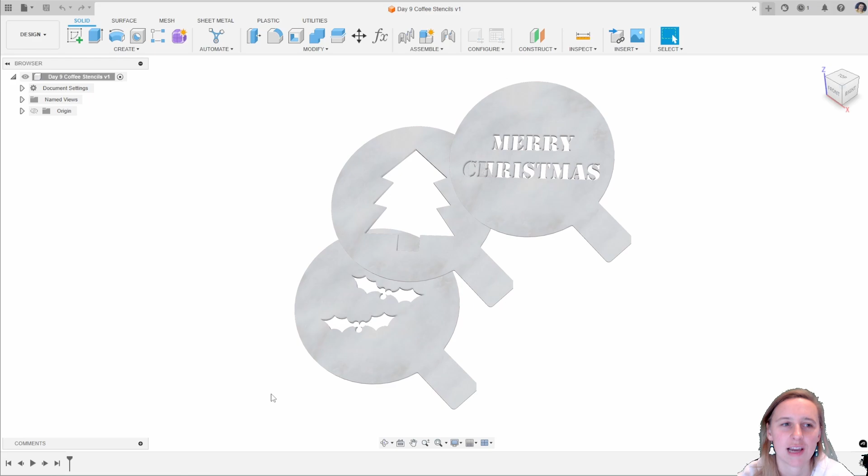In today's session, day 9, we are going to be designing these coffee stencils where you can put them over your coffee and sprinkle some cocoa powder and end up with some little Christmas decorations. So let's jump into Fusion and get started.

For this one, I'm going to start off by creating a new component, and we'll use this to create copies for different little designs that we have. So I'm going to name this coffee stencil. Starting off with a sketch on my XY plane, I'm going to create a circle, and this is going to be 100 millimeters wide.

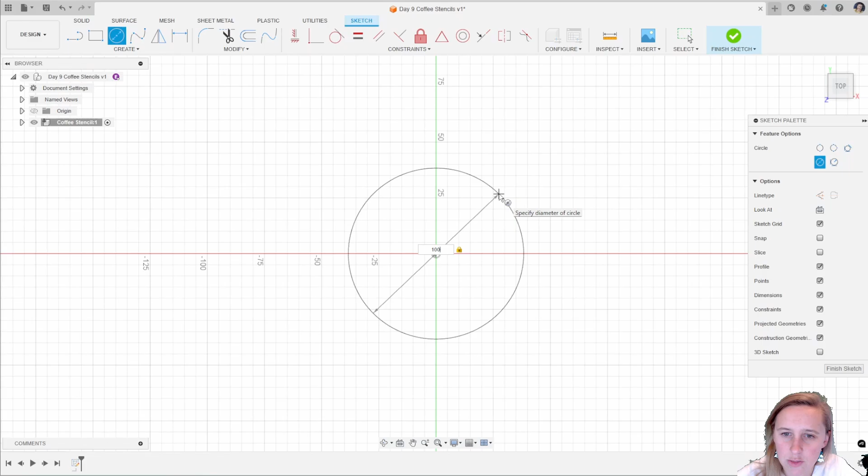Now you could either 3D print these or you could laser cut this particular design because it's going to be a flat 2D cross section all the way through. I'll design it for my printer, so 100 mil I know will fit on my printer.

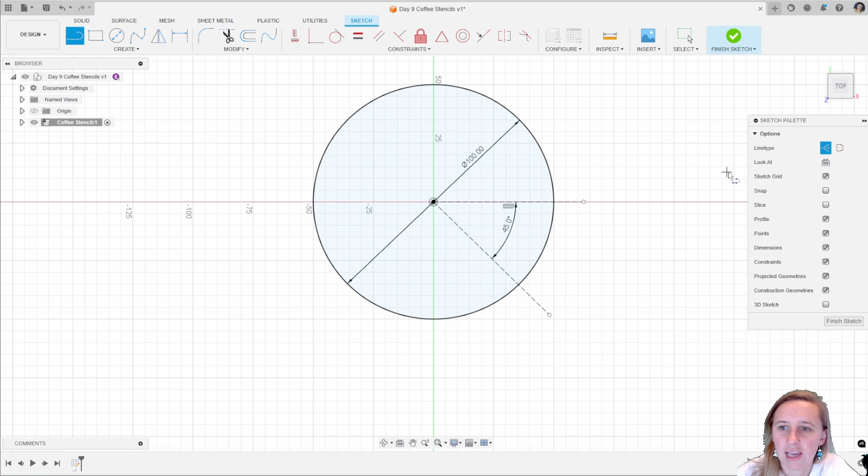Adding in a couple of construction lines, one to the horizontal and another one down here. This little button will give you a construction line, adding a dimension of 45 degrees here, and then adding a new line, turning off that construction, coming down here and bringing that over here.

Now I want this to be symmetric around this line, two different ways. I could add a midpoint constraint from here to the end of that line, or you could use the symmetry, select the two outer lines and the inner one.

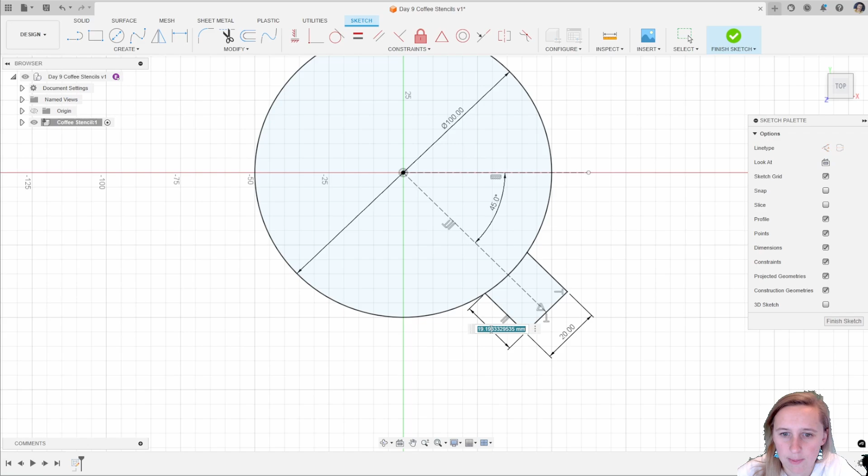Just want to dimension this, so I want that to be 20 millimeters and I want this dimension to be 30 millimeters. And this here is the section you use to hold the stencil over your coffee cup.

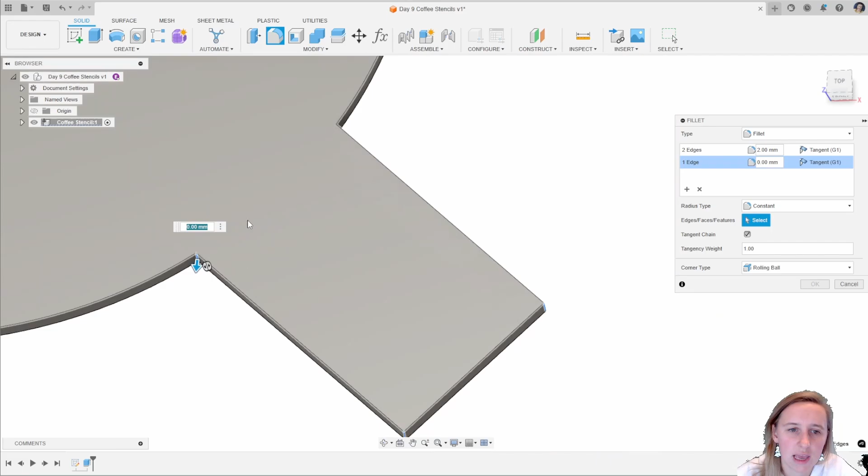I'm going to extrude this by 2 millimeters and then add a couple of fillets just to round off these edges. Selecting this end point here and this end point here as 2 millimeters, adding in a second fillet to the same operation for those two inside edges, and that one's going to be 1 millimeter. And that there is my baseline for my coffee stencil.

I'm going to save my work and activate the top level assembly component. I'm going to right click and copy that stencil. Clicking there, I'm going to paste as new, and this will create a new component, which is not linked to the first one. So I'm going to name this tree, which is the first design that I'm going to do, and I'm going to activate this design here.

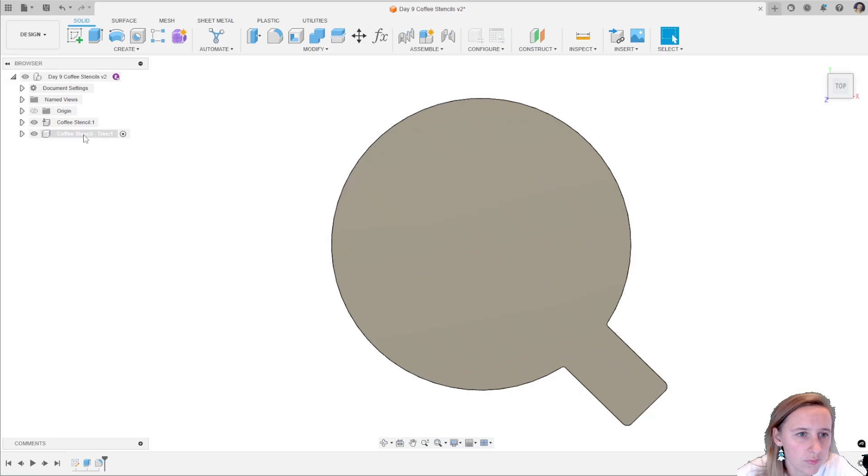I'm going to create a sketch on the top level component, and this one's going to be a very basic Christmas tree design. So adding in a line for my center, I'm going to use a mirror for this one and coincident that to my origin. And then just using the line tool to design the shape that I want the Christmas tree to look like.

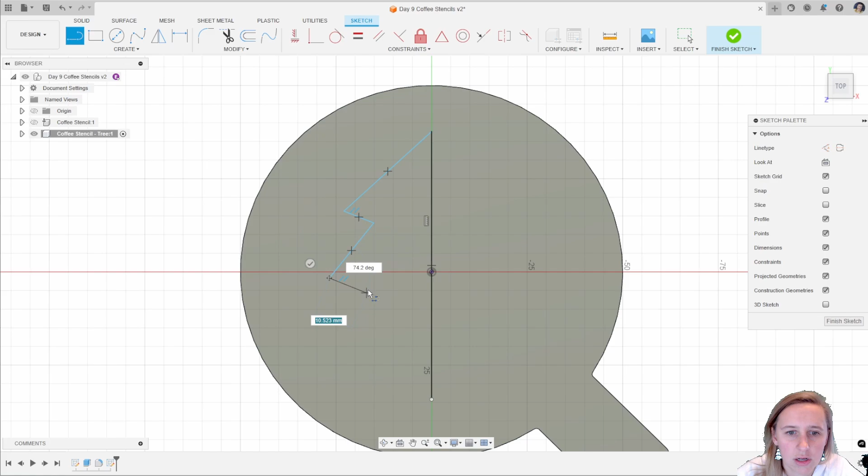It's really up to you kind of what shape you want to do. I'm going to add a little bit of a stalk. Make sure you don't go too close to the edge of the stencil. But really the design that you do is entirely up to you and what you want that to look like. I'm not going to make it too big. I think that'll be fine.

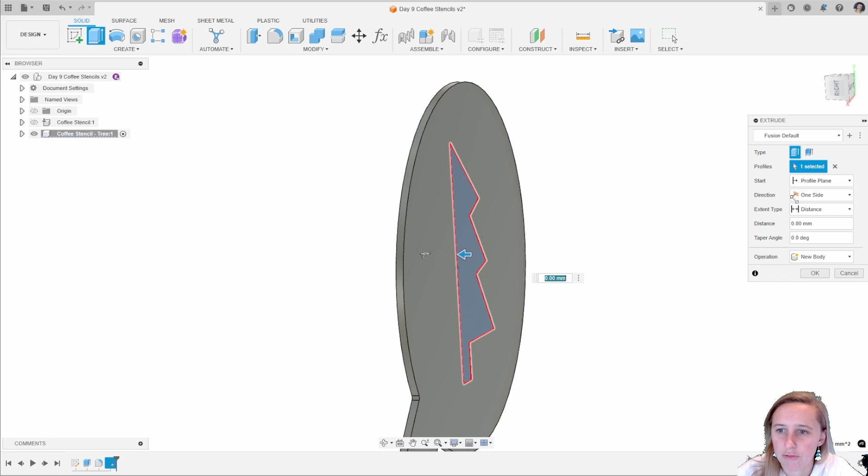I'm then going to extrude that through to this object here, making sure that I'm only cutting the body from this coffee stencil here. I'm then going to create a mirror, and I'm going to mirror that extrusion. I want it to be a feature mirror of that extruded cut, and mirror that in the plane here. Clicking OK to finalize that design.

And that there is my very first stencil that I'm doing. So just a very basic Christmas tree stencil on there.

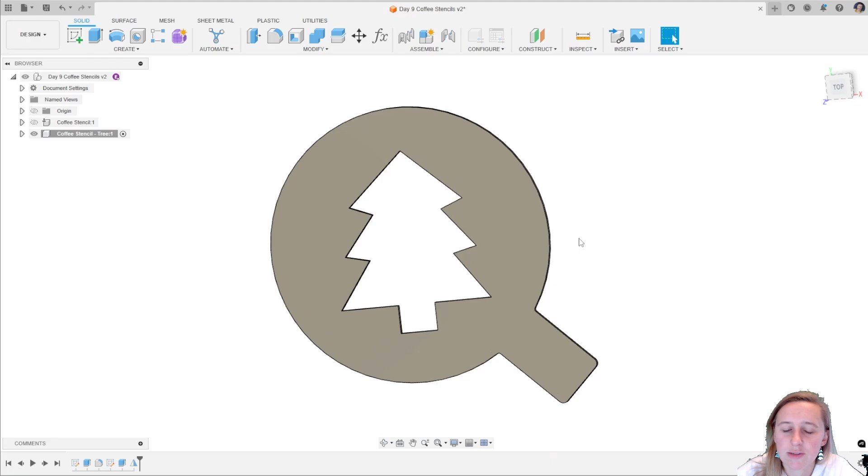So I can save my design. Now going back to my top level component, I've got that first coffee stencil base that I did. Right clicking on there, I can click copy and click paste as new to give me another one to do.

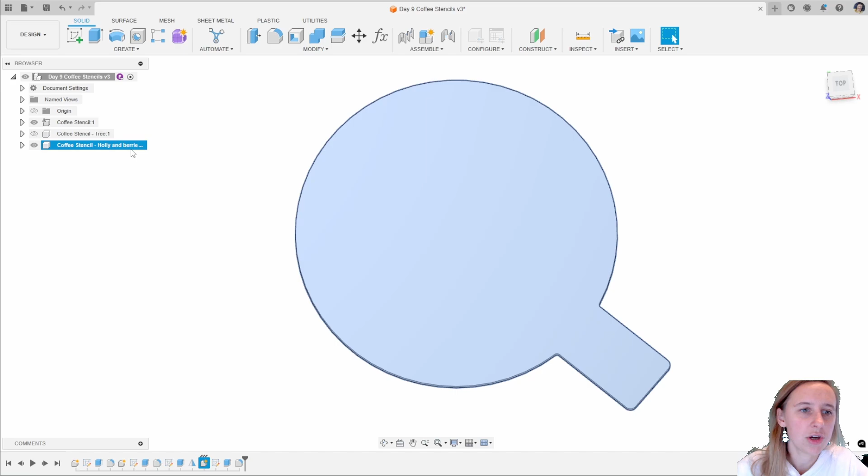So this one, I'm going to show you a trick how you can use other designs that you've already done. If you've done the holly and berries video, you can use the sketch from that design to cut out your stencil for this one.

So if you open up your holly and berries design, we're going to use the sketch we used to create our holly and berries the first time. I'm going to select all of that and click copy.

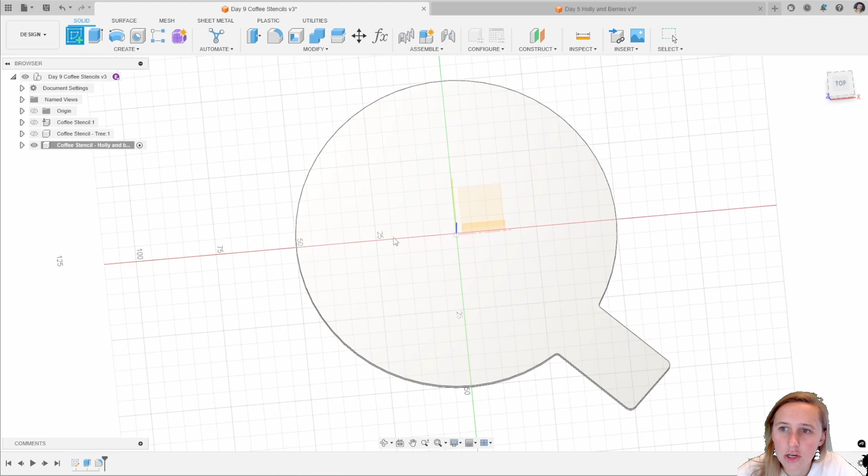I'm going to go back to my coffee stencil, create that new sketch on the top surface, and click V to place that. Then I'm going to orientate it round and drag that into position where I'd like it to be. Actually you could maybe do a couple of these for this particular one.

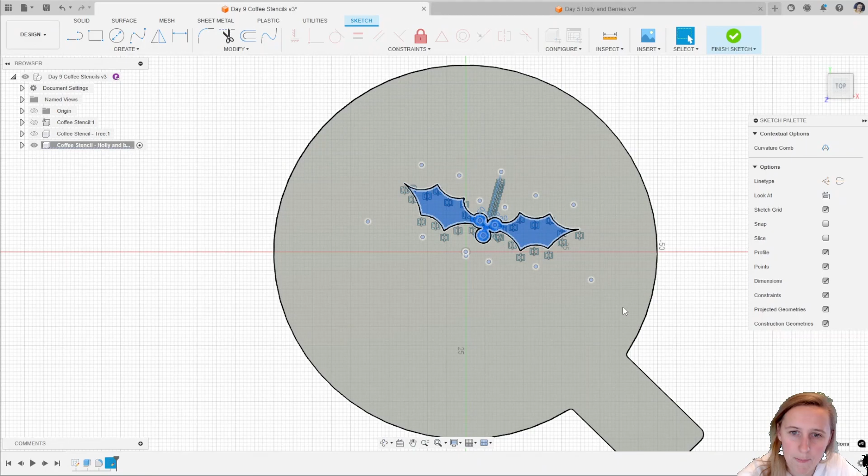So clicking OK, that will give you the outline of the holly. I'm going to copy and paste that again and move that down, popping one in a slightly different orientation there. So just adding 2 of those onto this design.

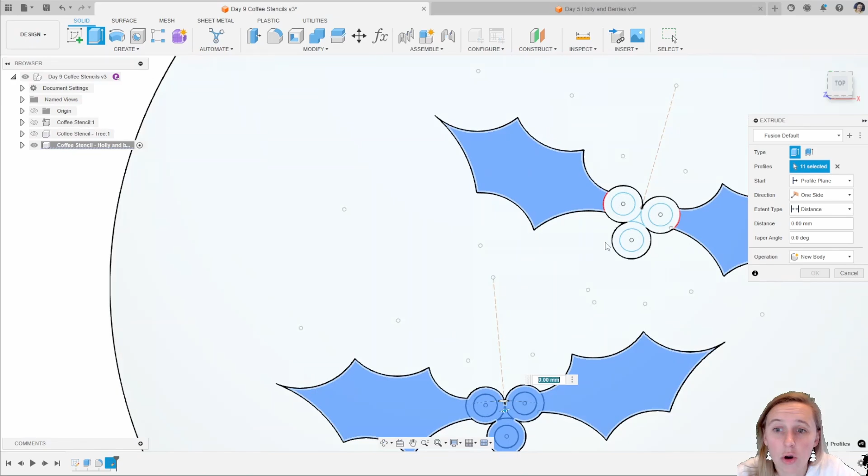And we want to do an extruded cut with that, with the distance set to object on the back plane there. So there we go, you can cut through some holly and berries. That's using a sketch that you've already created in a different design.

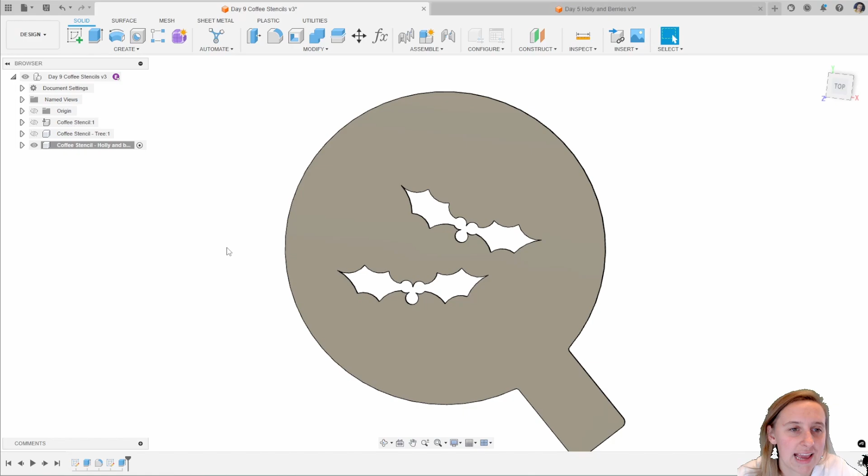And the final one that I want to show you is using some text. So again, activating my top level component, I'm going to copy that first component again, right click, paste as new. We're going to use the text tool to do this.

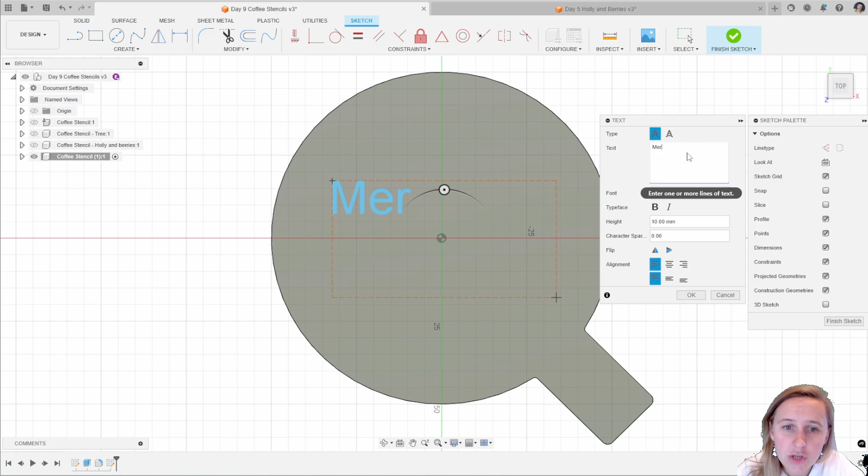Now, a caveat with this is that you need to use a stencil friendly font. If you don't have a stencil friendly font, what will happen is when you cut this out, you'll end up with pieces that are not connected to others and they will sort of fall through.

So you want to use something like - there's actually a font called Stencil that's pre-built into Fusion. If you scroll down and look for Stencil, I'll show you how that looks.

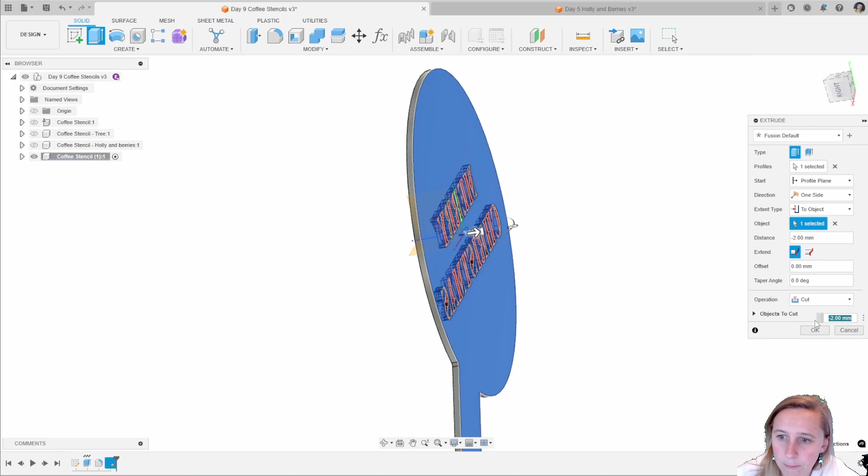So finishing that, as it says Merry Christmas, and then extruding just the letters. The profile I want to extrude is those letters, and the distance is to object on the other side. The object I want to cut is just this stencil that I am doing here.

So what I meant by not a stencil friendly font is that there's no pieces that are joined together. If this was all fully through, if you cut it out, then the center of the R would cut out too. So there you go - that's a font you can use to create stencils inside Autodesk Fusion.

That's just 3 examples of creating stencils - we've got the tree, the holly and berries, and the Merry Christmas. It'd be really interesting to see what you do. Please do post your ideas in the comments below. If you've got any questions, let me know in the comments.